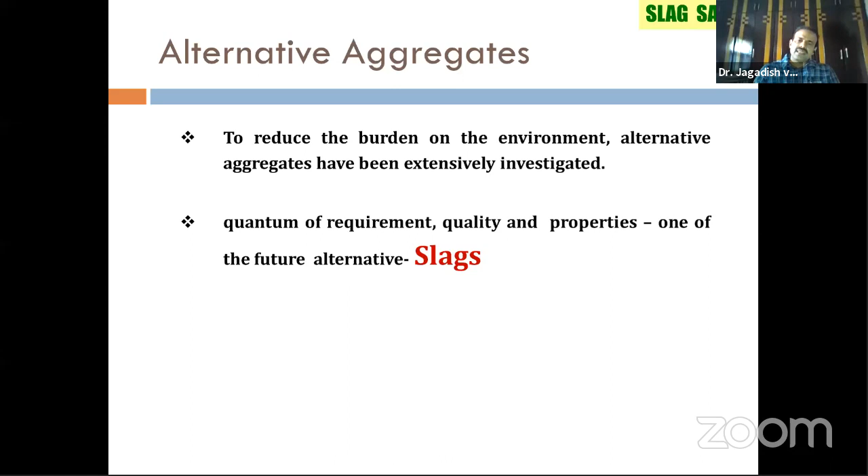When you look into other countries and even our country, these aggregates have proven as suitable material for replacing natural both coarse and fine aggregates. I'll explain how slags are used as a coarse aggregate in concrete.

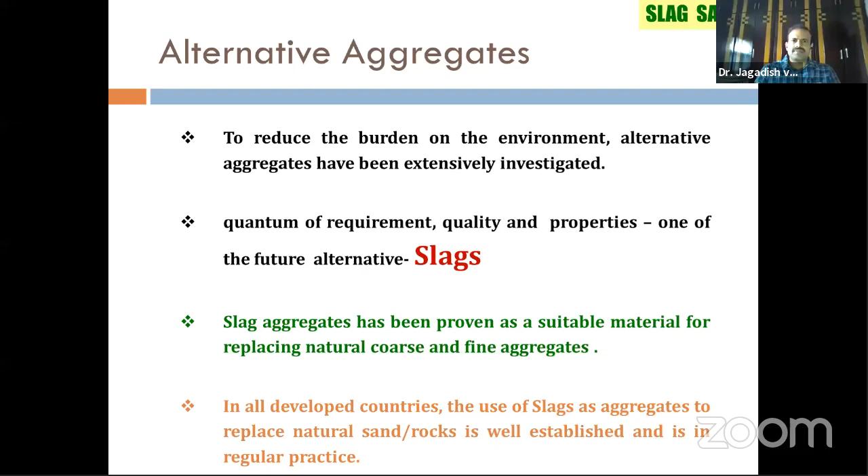When you look into the basic definition of slag, you can see this is blast furnace slag. It is a non-metallic product, consists of glass, mostly contains silicates and aluminosilicates of lime, which is produced in the steel industry while steel making. It is basically a byproduct of the metal smelting process under quality control conditions, because you maintain some temperature and then do quenching, wherein you get the slag along with the main product like iron or steel. So this is basically a byproduct.

It is obtained by rapidly chilling or quenching the molten slag, either by water or by air. So you have both types: air-cooled slag, or by quenching with water you get a different slag. Compared with natural river sand, this sand doesn't contain any organic matter, clay, silt, or shells, because you don't mine near the riverbed. It's a byproduct from steel manufacture.

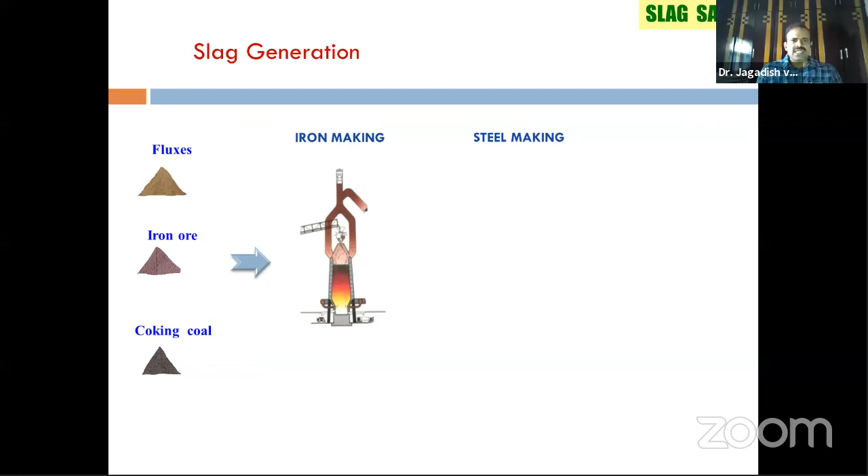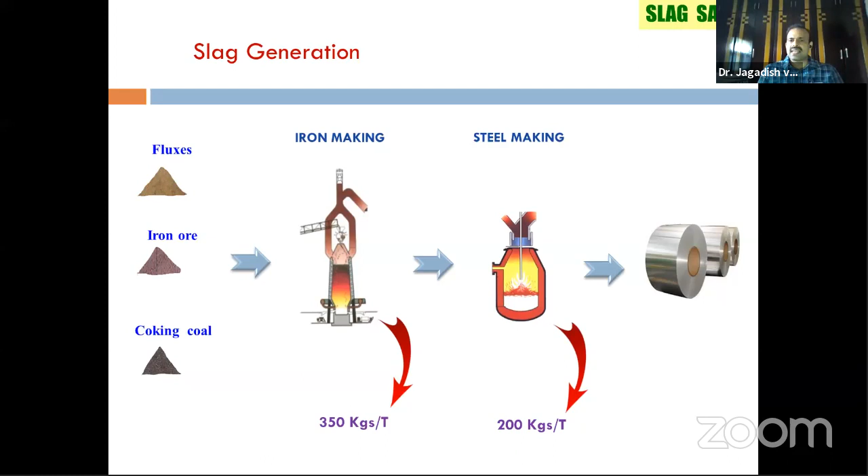When you look into slag generation, both in iron making and steel making, you need to understand the difference. You take the iron ore and coking coal and mix along with some fluxes. In iron making, typically per ton of iron production you get 350 kgs as a byproduct, which is slag. Similarly in steel making, you get almost 200 kgs per ton of steel production as a byproduct slag. But most of the slag generated as a byproduct was dumped in the backyards of these steel plants earlier.

These are some of the slag dumping units at various places and various steel industries.

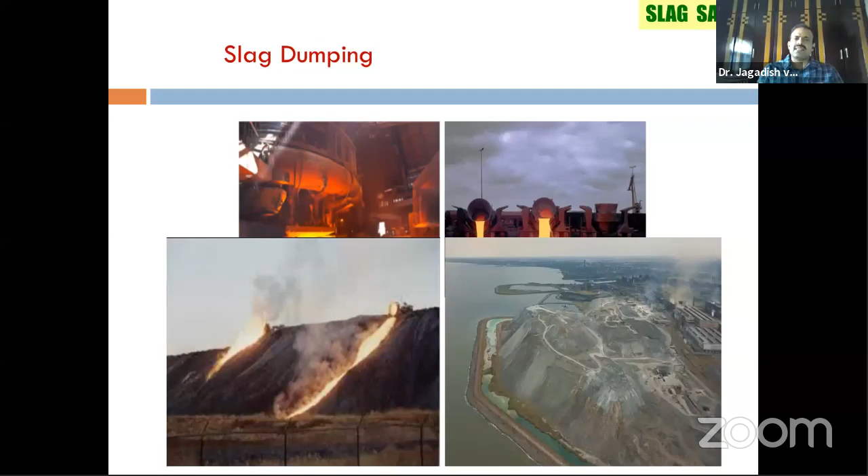Whatever byproduct slag you get from iron making, we call that granulated blast furnace slag, because here you quench it with water and the slag you get is granulated blast furnace slag. Typically this kind of slag you can use for coarse aggregate, fine aggregate, and even for making GGBS. That means this granulated blast furnace slag, you grind it to the required fineness and make ground granulated blast furnace slag, GGBFS.

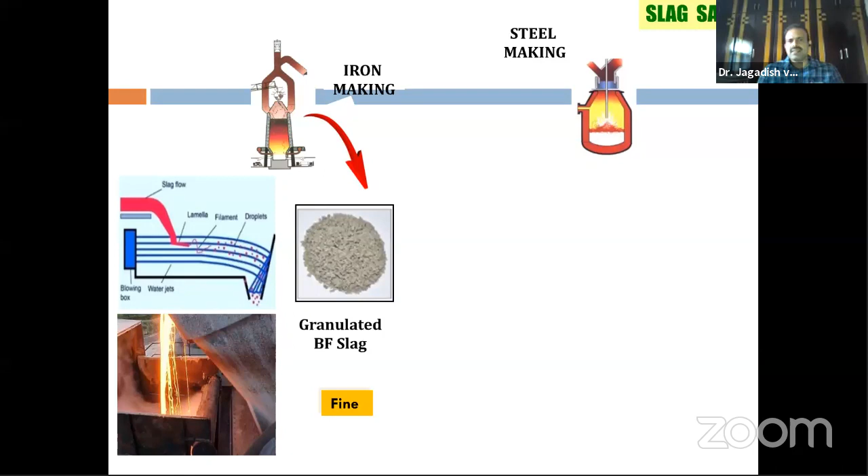When it comes to steel making, generally quenching is done by sprinkling a little water and doing air cooling. So what you get is air-cooled LD slag. This kind of slag we generally use as a replacement to the coarse aggregate.

There are some issues with whatever byproduct slag you get as an aggregate. One thing is it should match the natural aggregate specifications. We all know that to use aggregate in concrete, it has to satisfy the requirements of IS 383, and whatever slag is directly obtained from either steel or iron making has properties different from natural aggregates. Initially there were no standards or specifications to use these alternative aggregates in concrete. Later, in 2016, they included that you can use alternative, that means manufactured, aggregates in concrete.

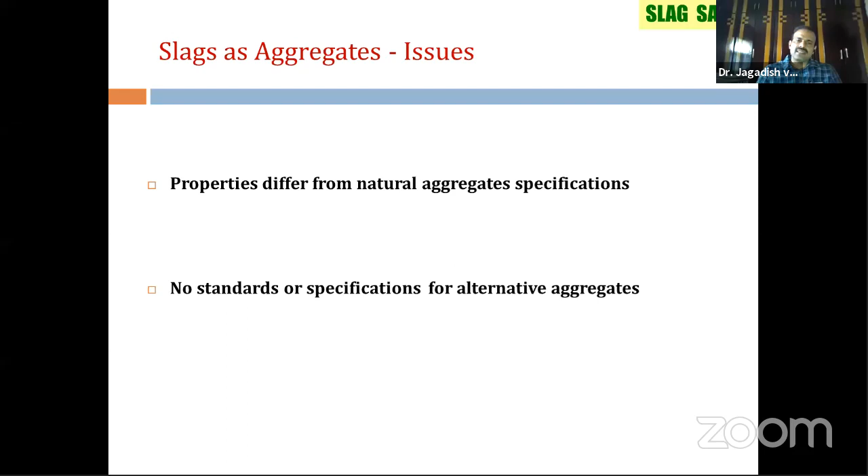So now I talk about granulated blast furnace slag as fine aggregate, that means in place of river sand. When you test river sand as per IS 383, it has to meet some specifications, like size requirements - gradation, zone 1 to zone 4, where zone 1 is coarser and zone 4 is finer. There should also be limited deleterious material, and it should satisfy soundness properties and bulk density.

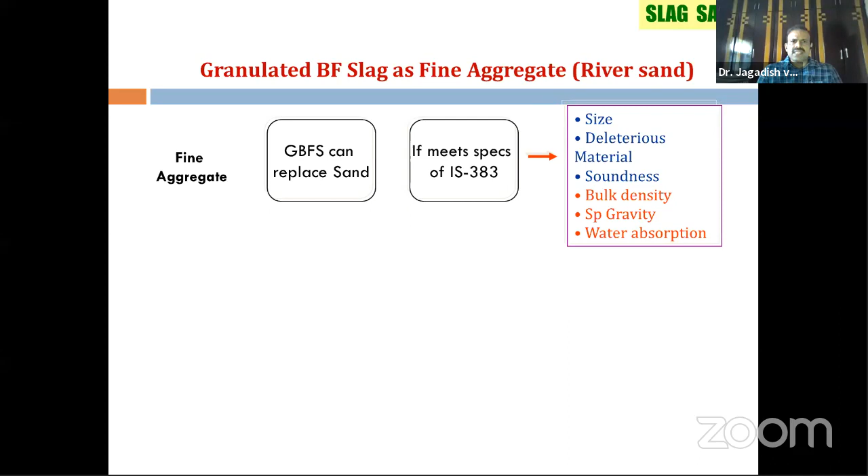Typically the bulk density of sand is between 1500 to 1650 kg per cubic meter. Specific gravity, as we all know, is 2.58 to 2.65 for natural river aggregate. Water absorption properties should also be less, maybe less than 0.5 or less than 1 for natural river sand. So granulated blast furnace slag, if it has to replace sand, it should meet the specifications of IS 383.

When you look into the natural river sand as per IS 383, generally we use zone 2 or zone 1 sand in concrete, sometimes zone 3 also.

Deleterious material is approximately 0.2%. Density, as I mentioned, varies between 1400 to 1700. Specific gravity also between 2.6 to 2.8, depending on the river. And water absorption varies when we check.

For granulated blast furnace slag, if you want to use it as river sand, it has to meet all these requirements. But when they check, density is between 1000 to 1100 kg per cubic meter. Water density is 1000 kg per cubic meter. So if you have to use it, it should match with the river sand properties.

Specific gravity is also less when compared with natural river sand, it is 2.3. Water absorption is also more, that is 4 to 6%. So if density is less, specific gravity is less, and water absorption is more, that means some kind of pores are present in this granulated blast furnace slag material, a vesicular structure containing small pores.

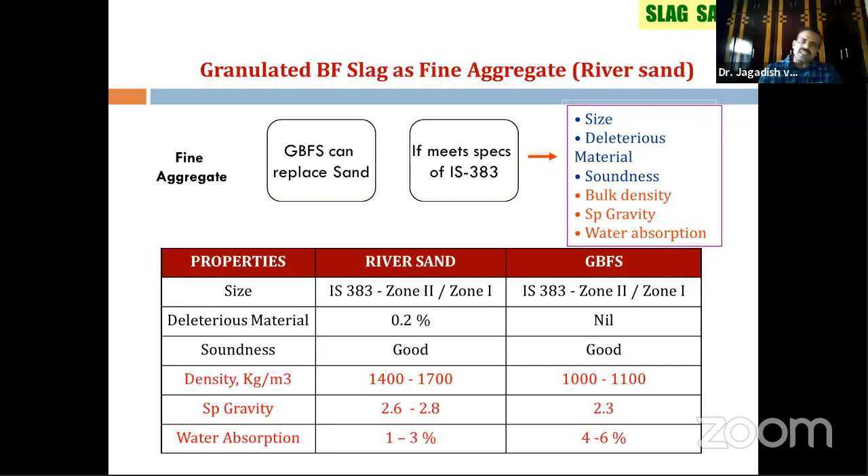So they did microscopic studies comparing river sand and granulated blast furnace slag, because if you have to use it as river sand, it should meet the properties of IS-383.

When they looked into it, it has got a lower density like 1000 to 1100. It contains a vesicular structure with the presence of micropores, meaning more pores, so water absorption will be more compared with river sand, and obviously low density and less specific gravity.

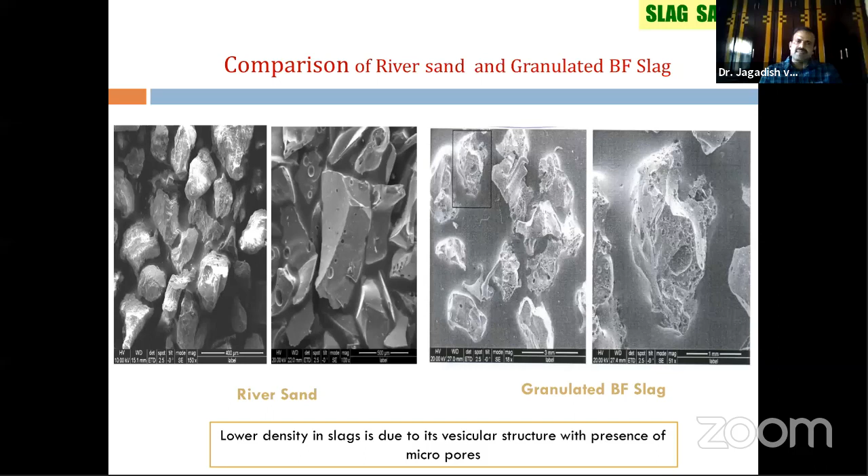So when you use it, you have to match with the requirements of IS-383 and it should match natural river sand properties. So what they did was change a little bit of the processing of this blast furnace slag by changing shaping and screening in the process itself.

They altered the granulation parameters and did some shaping and screening in the machine while making it. By doing so, the particle shapes of this blast furnace slag improved. You all know that flaky or elongated coarse aggregate particles create more voids compared with cubical shape aggregates, so you have to reduce sharp edges and needle shaped particles.

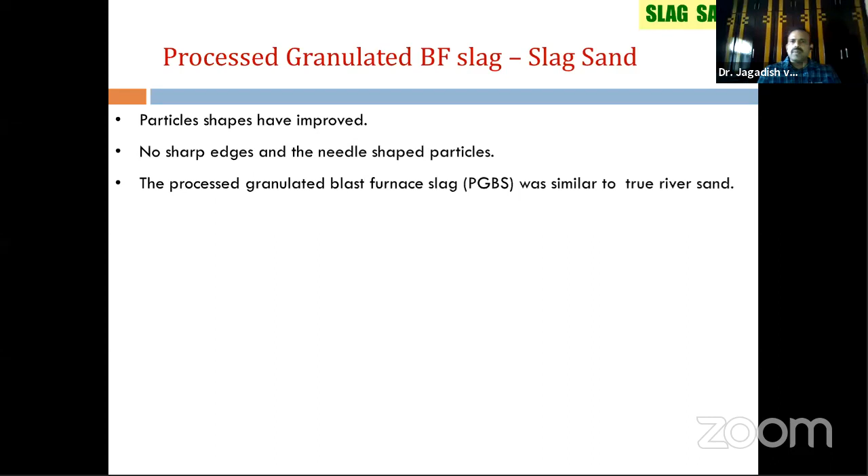By changing the parameters, they achieved better property particles, and the processed granulated blast furnace slag, which earlier gave low density, more water absorption, and less specific gravity, now improved after processing, and these properties are similar to river sand.

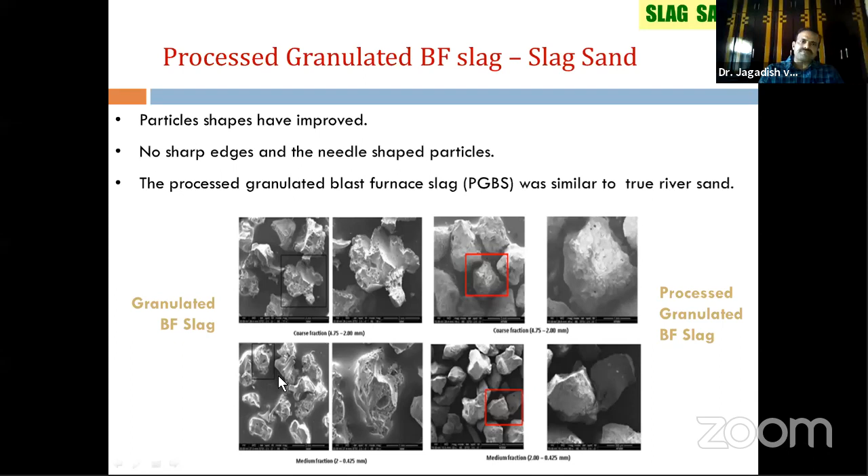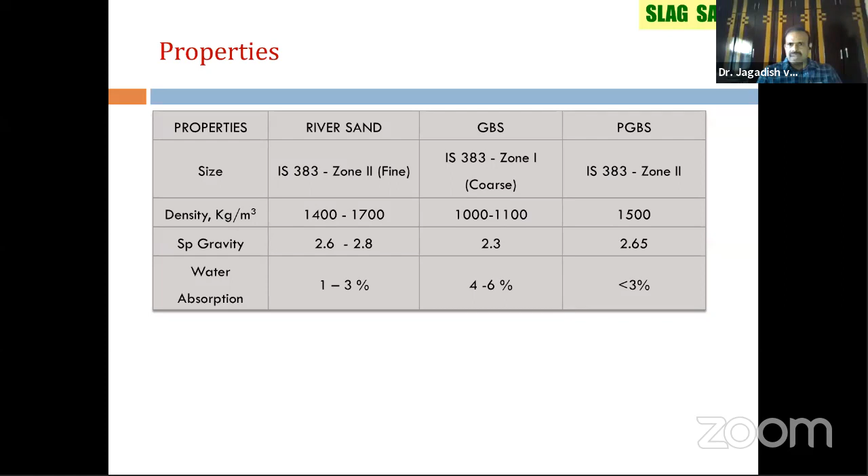So when you look into the properties after processing, density is almost 1500 kg per cubic meter. Specific gravity is almost 2.65, and water absorption is less than 3% as the pores reduced and the vesicular structure is minimized. So the processed granulated blast furnace slag properties are equivalent to river sand.

Some advantages other than density, specific gravity, and water absorption are important. Most river sand is collected from riverbeds, which contains marine products, oversized materials, clay and silt. What is the problem with clay and silt? We all know clay is an organic material. Once it goes inside, over a period of time it comes out and leaves pores inside the concrete, which is harmful to the concrete.

So when comparing processed slag sand to river sand, some of these marine products and clay silt issues are avoided compared with river sand.

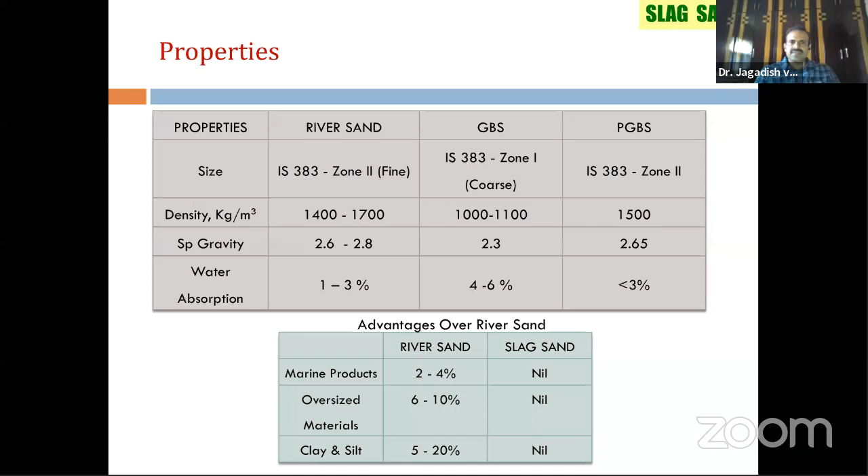Even microscopic examination shows the shape is similar to river sand after processing, and it is almost similar to manufactured slag or manufactured sand. So you can use this processed slag sand either 100% or in combination with river sand or crushed rock fines, whatever combinations you can use.

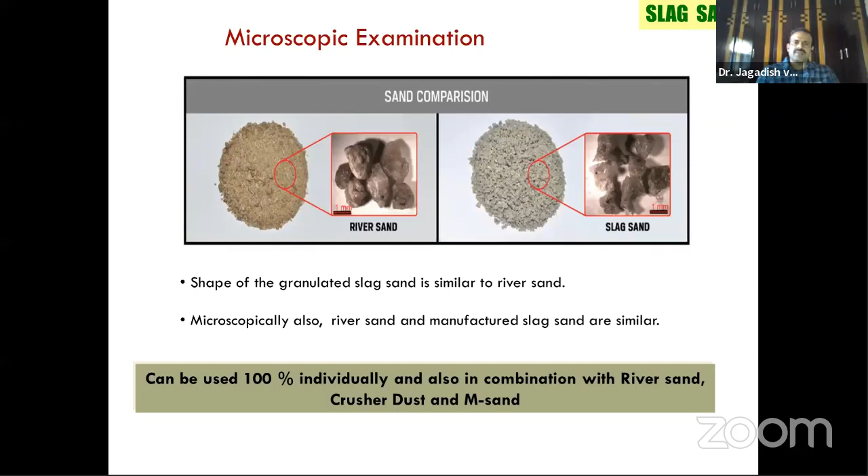Chemical tests were also conducted for this processed slag as per IS 383, as I mentioned. They conducted soundness tests, chlorides, sulfates, and pH. When they checked, it is much lower than the maximum requirements. Take the case of magnesium sulfate, maximum 15% is allowed, but this is only 2%. And even alkali aggregate reactions.

Once you match the river sand requirements, this processed slag, you need to see how the properties of both mortar and concrete behave when you use it as a fine aggregate. So some tests were conducted, as you can see here.

One thing is you can check the flowability, comparing flowability with river sand versus PGBS. The top pictures show river sand and the bottom pictures show processed granulated blast furnace slag. Even the durability tests were conducted and these are giving good results.

You can see the comparison of strength when you use fine aggregate of 100% natural river sand versus various percentages of granulated and processed granulated slag, combinations of 50-50, and with natural sand, M sand, and crushed rock fines. The strength is almost similar. When you compare natural river sand to the processed one, it's almost similar, maybe a little bit different by 1 MPa, which we don't really consider, but it's almost matching. Even when combined with other materials like natural river sand, manufactured sand, or crushed sand, it gives almost the same strength.

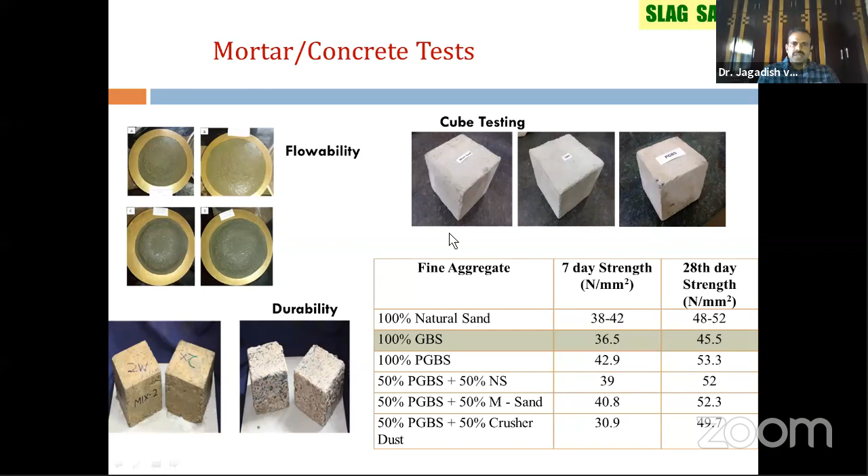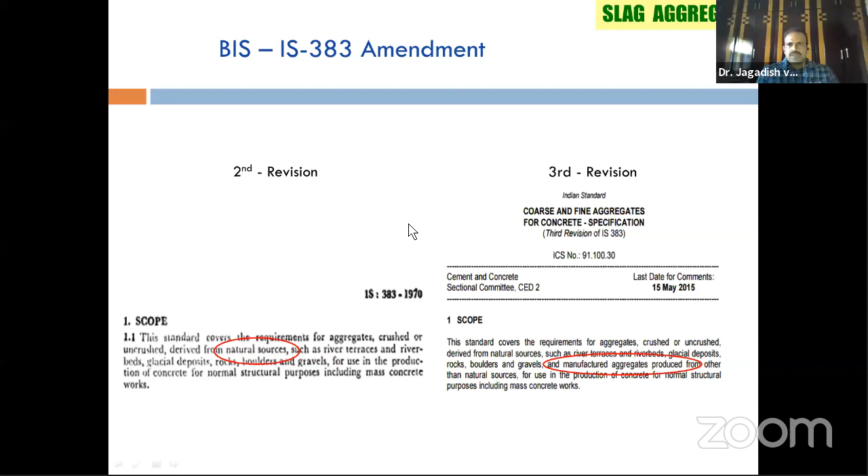This is about the initial trials. Based on these trials, they made an amendment in 2015, as I mentioned. Earlier they mentioned only river sand, meaning sand derived from natural sources like river beds, deposits, rocks, and so on. But for the first time, they included manufactured aggregates produced from other than natural sources, meaning you can now use granulated blast furnace slag as a fine aggregate replacement. This amendment was made in IS 383.

IS 383:2016, which is the third revision, talks about different aggregates. We have already seen iron slag aggregate, that is processed blast furnace slag aggregate. The IS code mentions iron slag obtained from producing iron in a blast furnace, from iron or steel plants, as molten slag at a temperature around 1500 degrees centigrade, suddenly taken out from the furnace and cooled to form different types of slag products.

One is air-cooled iron slag aggregates, the other is granulated iron slag aggregates. In the first case, it involves quenching with water and then cooling and crystallizing. In the second case, granulated iron slag aggregates involve quenching rapidly with large volumes of water. So this is the difference between air-cooled iron slag aggregates and granulated iron slag aggregates.

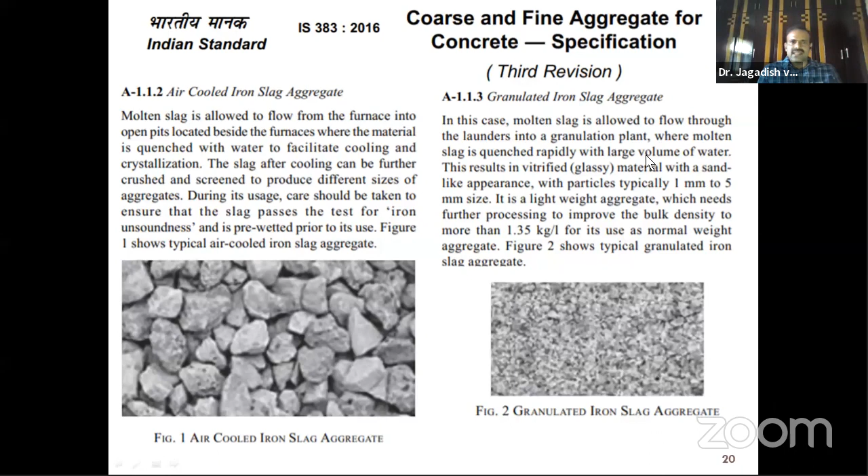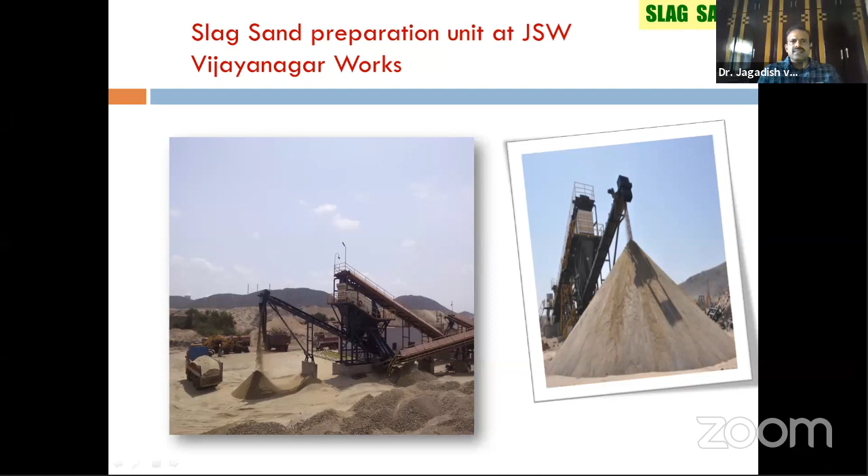This is a typical plant where processed slag sand is prepared at JSW Cements, Ballari, in Vijayanagar—an entire area is the factory. It has a lot of advantages; you can use it in airport runways, highways, flyovers, buildings, and it's suitable for various purposes like concrete, plaster, mortars, and so on. Anyway, I will explain one by one, and I'll take questions at the end.

Once they got approval to use it, they started using it within the plant itself. Slag sand is used in foundations, flooring, and roads within their complex, and even paver blocks were made using slag sand. Even the plastering was made using slag sand. So within the steel plant, they've started using it extensively.

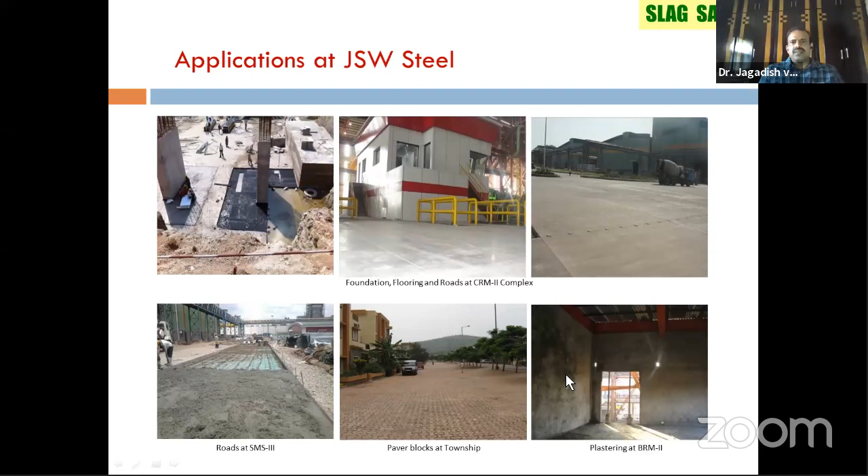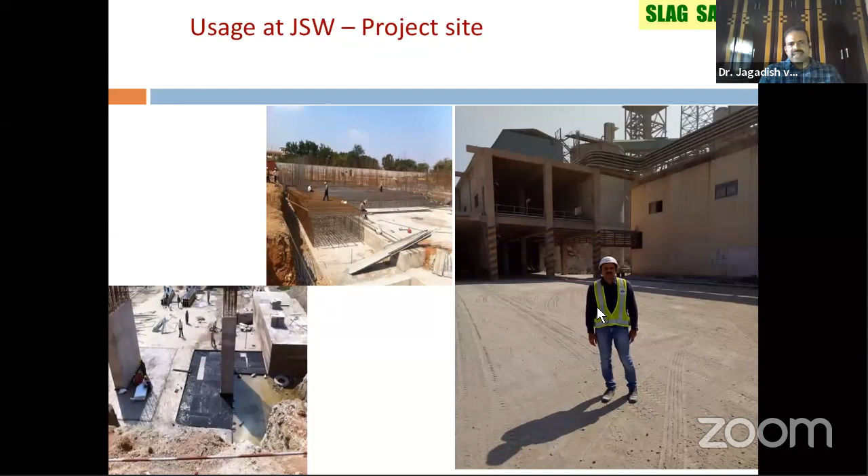I was standing here during my visit to the JSW plant, where I had an association with these people for almost one month. We did some experiments at various sites and so on. They've even used it for flooring for heavy loads, where Professor Nagasrinivasa and the principals mentioned in their initial comments that it is very good in abrasion resistance also.

After using this slag sand internally, they started supplying it to nearby places. The nearby city is Ballari. They started supplying to Nirmithi Kendra buildings, meaning state government projects, and started using it for plastering applications. You can see here, plastering work going on, where the slag sand is used as a fine aggregate.

So this is about the slag sand used as fine aggregate. Coming to the coarse aggregate, as I mentioned, there are two types of slags—it comes as a byproduct: one from iron making and the second from steel making.

In iron making, you get a byproduct of 350 kgs per ton. In steel making, you get 200 kgs per ton. Steel slag aggregates are cooled down from 1400 to 1700 degrees centigrade and suddenly quenched in air.

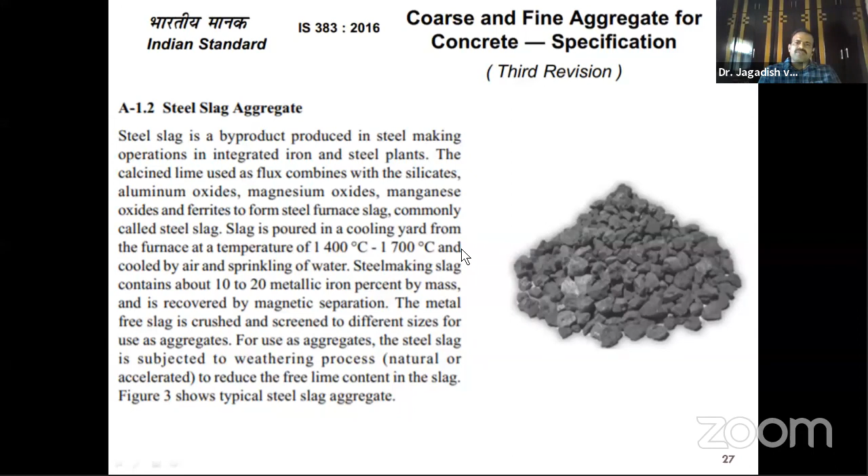That means this is air-cooled steel slag, as we call it, with a little bit of sprinkling of water done during the process. So this is a byproduct, steel slag aggregate. Because it's quenched out in air, the density is much, much higher compared to the other slag—almost like 3.2 to 3.5 specific gravity.

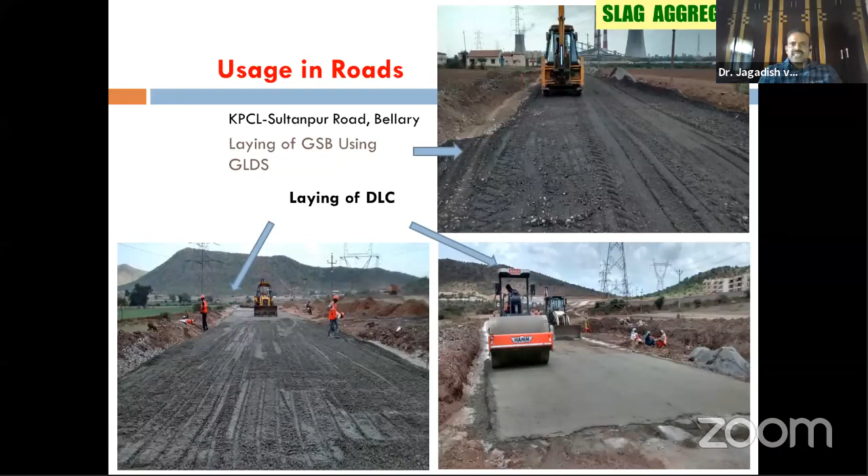This steel slag coarse aggregate can be used as a coarse aggregate. They started using it for internal roads within the campus. So if you take road works, you can use it for all purposes - as a granular sub-base, in dry lean concrete, and even in pavement quality concrete, PQC. You can use it in all 3 layers.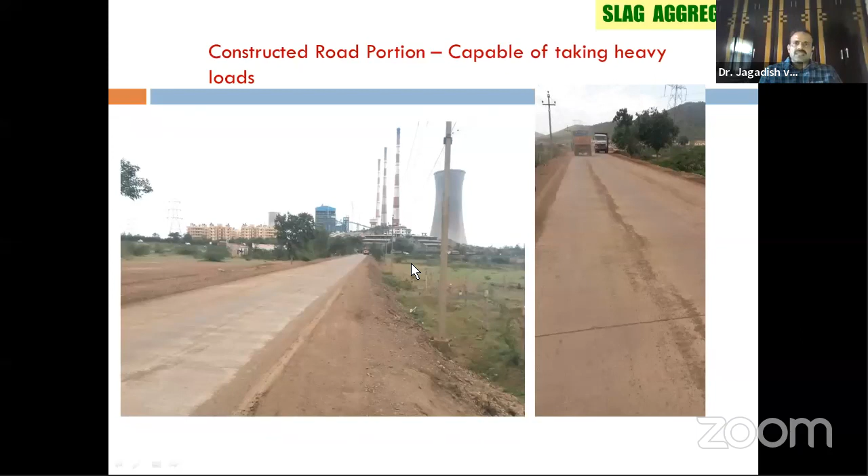This is one of the road portions constructed using the coarse aggregate, steel coarse aggregate. You can see a lot of heavy trucks are moving around on it.

A very interesting thing - while coming back from the JSW plant, I observed this Hospet Bellary Road, National Highway 63. Gammon people did the work and they've utilized this steel slag as coarse aggregate. You can see on this side, the coarse aggregate is lying next to the road. So this is the first time in India a complete slag-based road has been made - the Hospet Bellary Road, NH63.

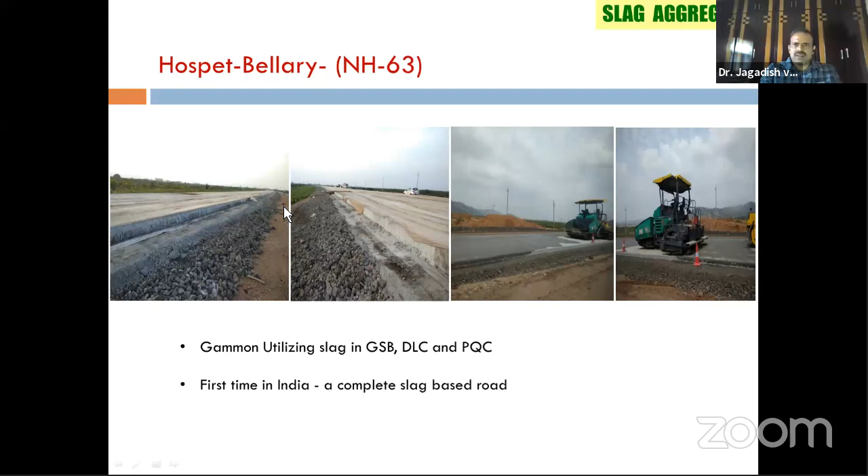So you've seen both fine aggregate and coarse aggregate, using slag as both fine and coarse aggregate.

Now I will come to GGBS, that is ground granulated blast furnace slag. You grind it to the required fineness and use it - finer than cement. If you take cement fineness, the Blaine's air permeability test shows the cement fineness is like 300 square meter per kg. This GGBS is much, much higher when compared with cement fineness - specific surface area, we call it.

So GGBS, as I mentioned, is molten slag produced during iron production, not steel. It is very rapidly cooled and slags are formed, then ground to amorphous form. This reactive matter, in presence of lime, forms further CSH gels because it contains silicates and aluminates of lime, and secondary hydration happens. You have to grind it to adequate fineness, and then you can use it as a cementitious material. The processed form of granulated slag we call ground granulated blast furnace slag, commonly GGBS.

So what does IS 456 say? When you look into IS 456:2000, in the table the maximum water cement ratio is 0.55 for reinforced cement concrete, and cement content starts at 300, with maximum cement you can use being 450 kg per cubic meter of concrete. IS permits this based on different exposure conditions - mild, moderate, severe, very severe, and extreme conditions. Depending on the exposure condition, you go for a minimum grade of concrete and minimum cement content, and restrict the water cement ratio also.

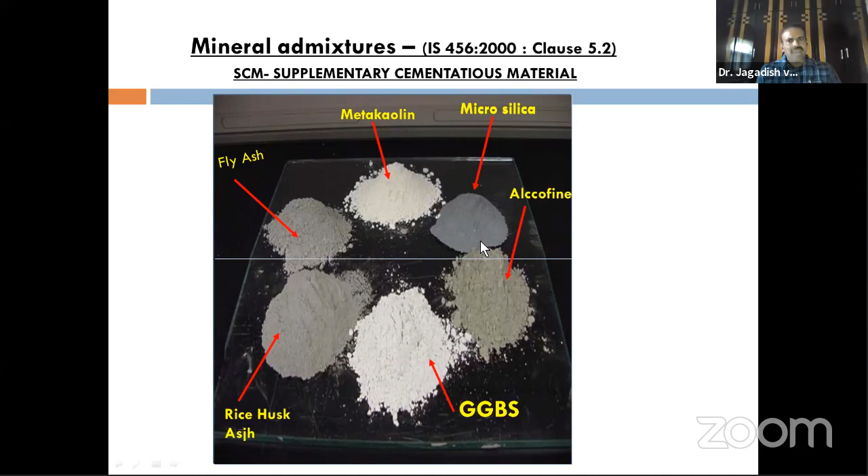IS permits you to use supplementary cementitious materials - GGBS, microsilica, fly ash, metakaolin, alcofines, rice husk ash. You can see fly ash, GGBS, and microsilica are the most commonly used materials.

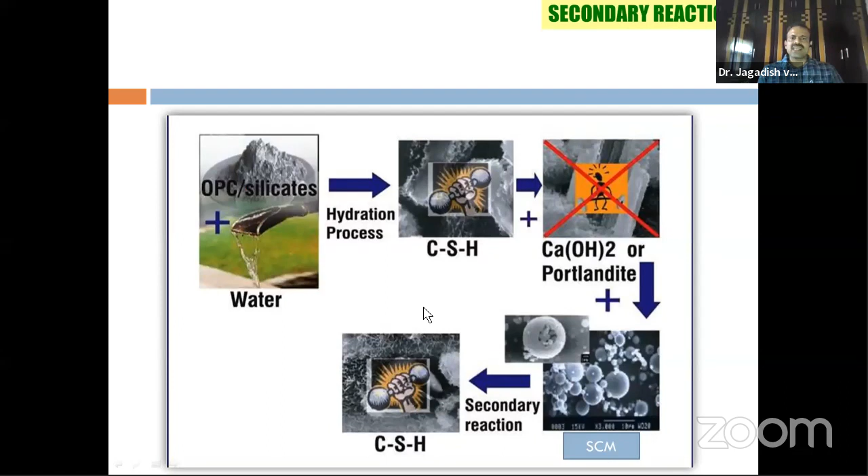So what do these supplementary cementitious materials do? When water is added to the cement during concrete manufacturing, the hydration process starts. We all know calcium silicate hydrate gives the strength - CSH gels form, and excess lime is present, which we call calcium hydroxide or portlandite. When you add supplementary cementitious materials like GGBS or fly ash, this excess calcium hydroxide reacts with them and forms further CSH gels. That means you are filling the pores and making the concrete denser by adding supplementary cementitious material.

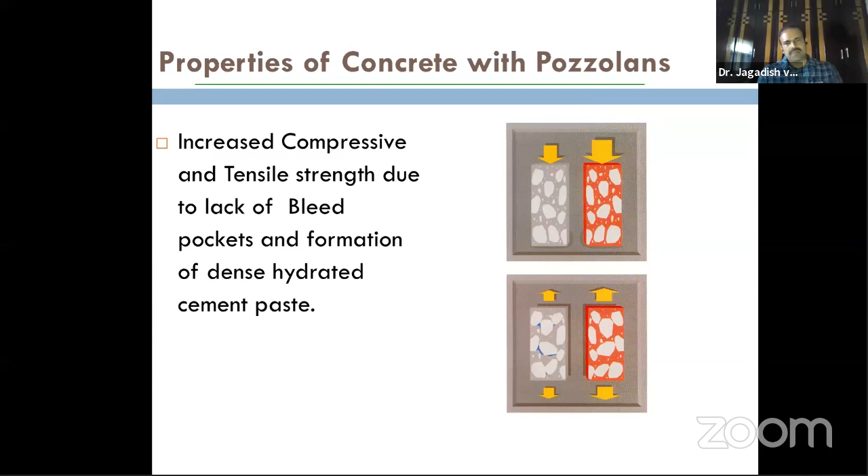But here our interest is GGBS. Anyway, this is the basic reaction - normal concrete has more pores, but here more CSH gels form and the concrete becomes denser. More denser means more strength, and impermeability increases. Because the bleed pockets are covered with excess CSH gels forming dense hydrated cement paste, you definitely observe increased compressive and tensile strengths in the concrete by adding supplementary cementitious materials.

When it comes to GGBS, the replacement levels of OPC - before explaining this, let me give an overview. You all know ordinary Portland cement, then Portland pozzolana cement, wherein fly ash is replaced up to 35% in the cement. And in Portland slag cement, they go up to 65% replacement - I'm talking about cement manufacturing, OPC, PPC, and PSC. But when you're directly adding supplementary cementitious material to the concrete, the replacement levels based on different works all over the world are like this.

Particularly for on the ground concrete structures, when aiming for higher early age strength, one can replace up to 25 to 35%. Underground structures face an aggressive environment because the soil is corrosive, so due to soil corrosion, one can go up to 35 to 50%.

For mass concrete, to reduce temperature and strictly control it, one can go up to 50 to 65%. For specialty concrete structures where durability is required, particularly corrosion-resistant marine structures and sewage treatment plants, one can go up to 50 to 70%, depending upon the different applications.

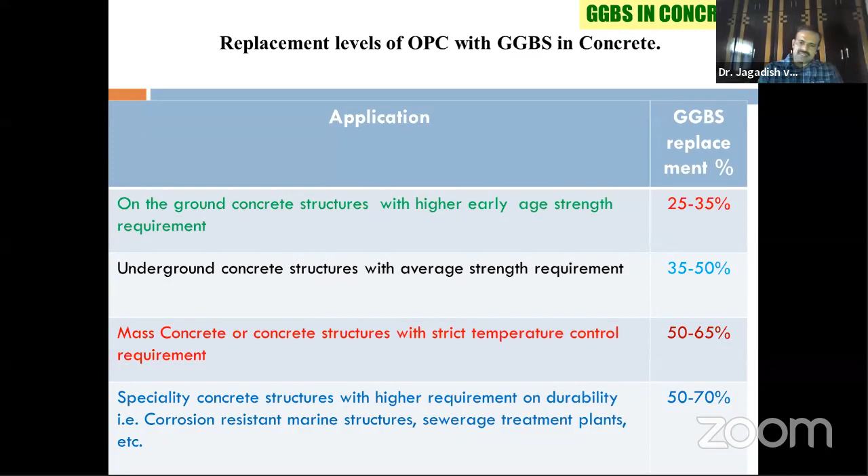But what IS says is we all follow IS 10262 to design the concrete mix. Till now, IS 456 or IS 10262 never talked about the percentage of supplementary cementitious materials. But when you look into the new IS 10262 2019, which is used to proportion the concrete mix, some guidelines are given.

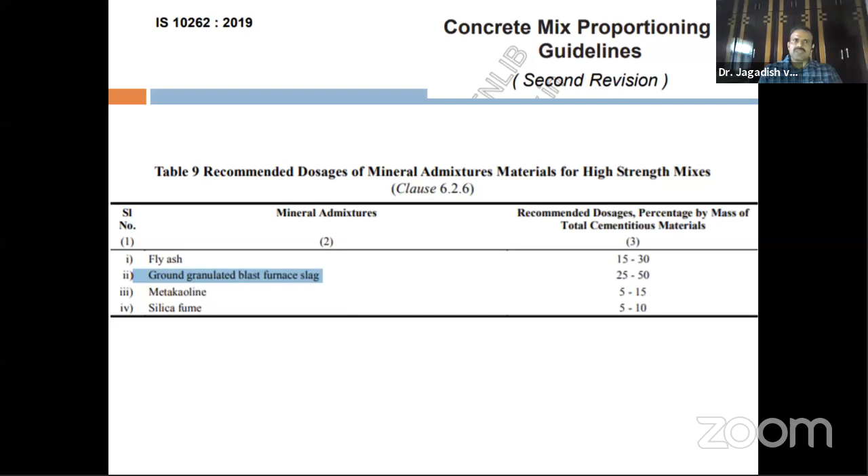For high strength mixes, among all the supplementary cementitious materials, GGBS can be replaced up to 25 to 50%, compared with fly ash which is 15 to 30%. So I'm just mentioning here, GGBS can be used up to 25 to 50%. You have the code support, IS 10262, and well proven test results.

This is one case study I've taken from our JSW friends. This is the Bangalore Metro Rail project, phase 2. These are some of the mixes used for pile, pier and segment, using both M35 and M50 grade concrete. For M35, they used 400 kg cementitious material, with 200 cement and 200 GGBS. For pier and segment columns, they used M50 with cementitious material up to 500 kg.

Somebody may ask, sir, you just told us 450 kg per cubic meter is the limit, but that 450 kg per cubic meter is for cement only. You can use supplementary cementitious material up to 600, particularly for self-compacting concrete, where cementitious material can go from 450 to 600 kg per cubic meter. In this case, they used 500 kg, with cement alone at 400 and the rest, 100 kg, as GGBS.

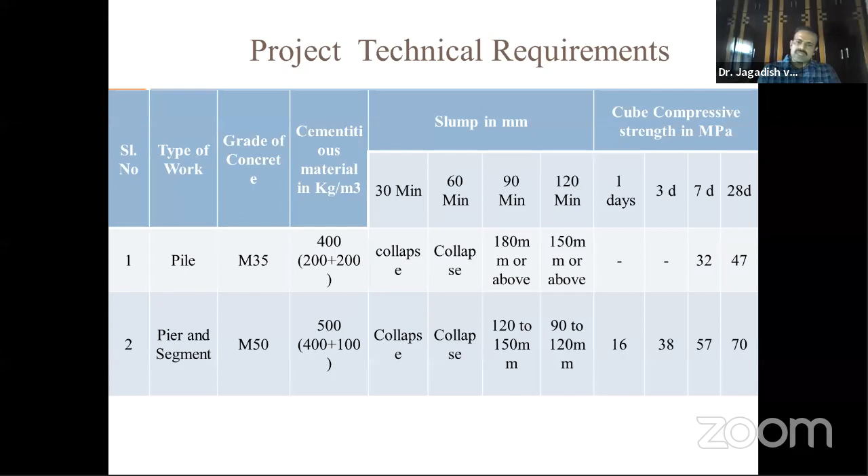You can see the slump at different delayed timings, and you can also see the consistent 28-day strength achieved: M35 got 47 MPa, M50 got 70 MPa. So these are some of the trials, the initial trials conducted before giving the mix to the client.

One of my friends, Mr. Yogananda, with whom we conducted a combined project, is from JSW and was present in this slide.

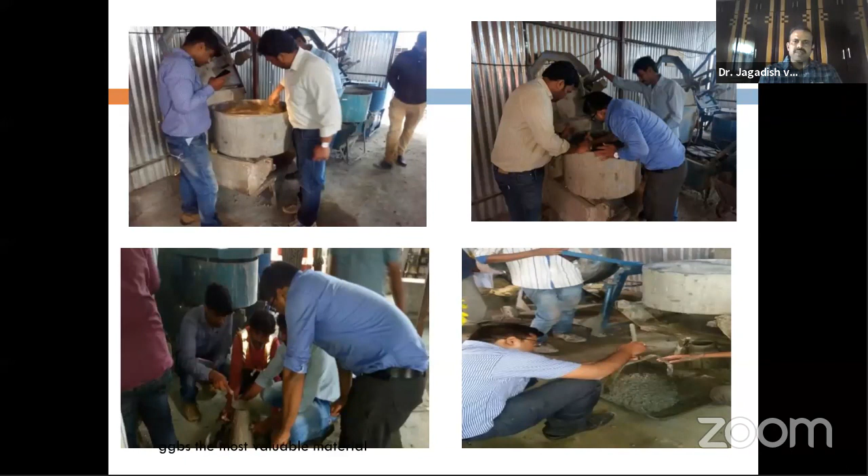When you are using GGBS or using admixture along with chemical admixture, you have to look into the compatibility between the cementitious material and the superplasticizer. To get a denser concrete, you have to reduce the water cement ratio, while at the same time achieving workability, which requires using a chemical admixture for workability and strength together.

To get the optimum dosage of superplasticizer chemical admixture, we use a test called the Marsh cone test. This is a hollow inverted cone with an aperture of 8 mm, where you pour the mortar into it, open the bottom gate, and measure the time required for it to flow through the small aperture, basically measuring the viscosity of the material.

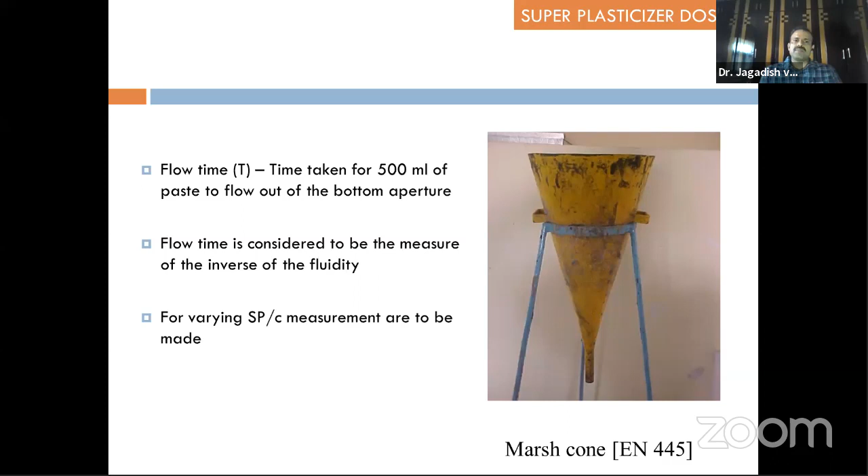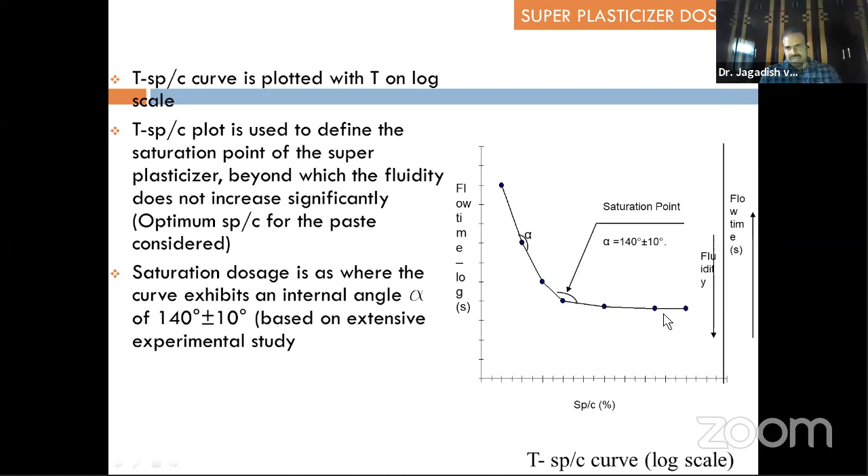Typically, you take 500 ml of paste, fill it in the cone, and measure flow time with different superplasticizer-to-cement percentages, plotting flow time versus superplasticizer dosage. You get a curve like this: after a certain point, even though you add more superplasticizer, there's no change in flow time. Typically, this saturation point is around 140 plus or minus 10 degrees.

These are some experiments conducted at our earlier college, BMS IT, with our students. You can see the Marsh cone where we placed the mortar and measured the flow time for a typical mix. At 0.1% admixture, flow time is 17 seconds; at 0.2%, 15 seconds; at 0.3%, 11 seconds. After 0.3%, at 0.4% and 0.5%, it gives the same seconds, meaning 0.3% is the optimum dosage of the chemical admixture, and beyond that you should not add more.

So that is how the marsh cone test gives you the optimum dosage of superplasticizer when you are using cementitious material, particularly when you want to know the optimum dosage of the chemical admixture for a particular concrete mix.

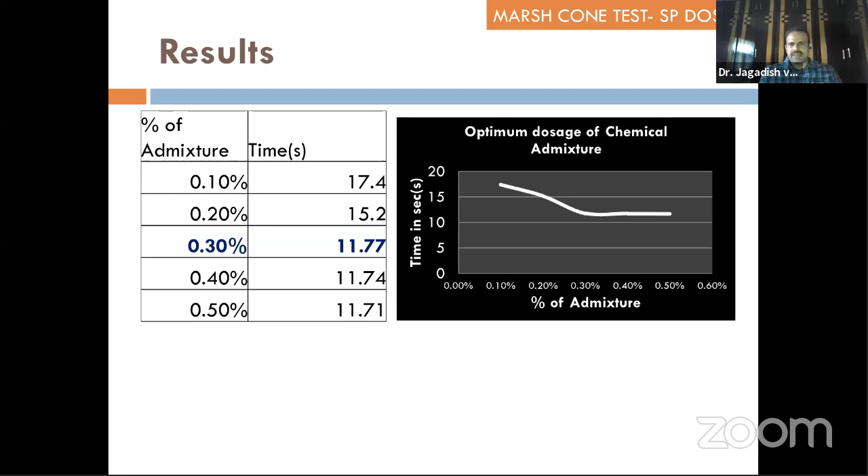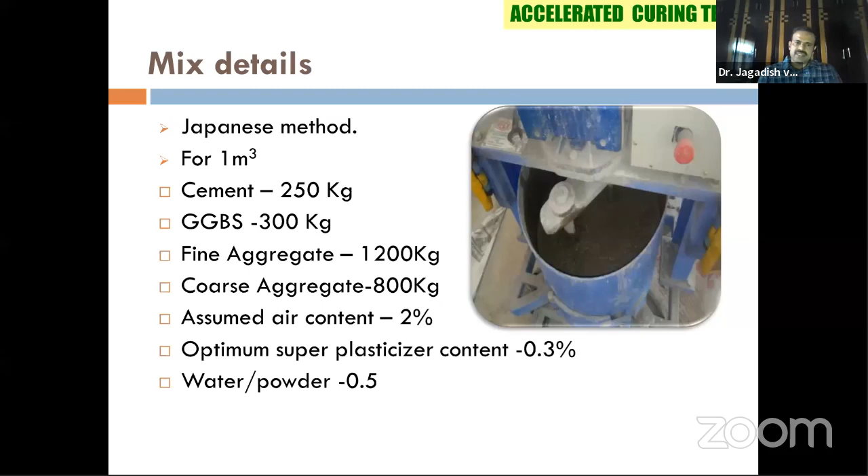Next, very important, is the accelerated curing test. Many times you go for a number of mixes, so you cannot wait for 28 days. You have to check the strength the next day so that if any problem is there, you can refine the mix, go for a second trial, and then check it again. Typically, all of you know how it is done.

You cast the cubes and leave them for 23 hours plus or minus 15 minutes. Then you remove the bottom mold, including the concrete mold, and place it in a curing tank of water at 100 degrees centigrade. You boil it for 3.5 hours plus or minus 5 minutes. Later, you remove the mold, take out the cube, cool it for 1 hour at normal temperature, air dry for half an hour, and then carry out the compression test.

You all know IS 9013 is the code wherein you check the accelerated curing strength and projected 28-day strength. The relation given is 8.09 plus 1.64 into RA, where RA is the accelerated curing strength obtained the next day after 27 or 28 hours.

This is one typical mix with a 100 mm cube using 12 mm down aggregate. We made the cubes, but the results are not shown here. That is how you conduct the accelerated curing test. I think something is missing.

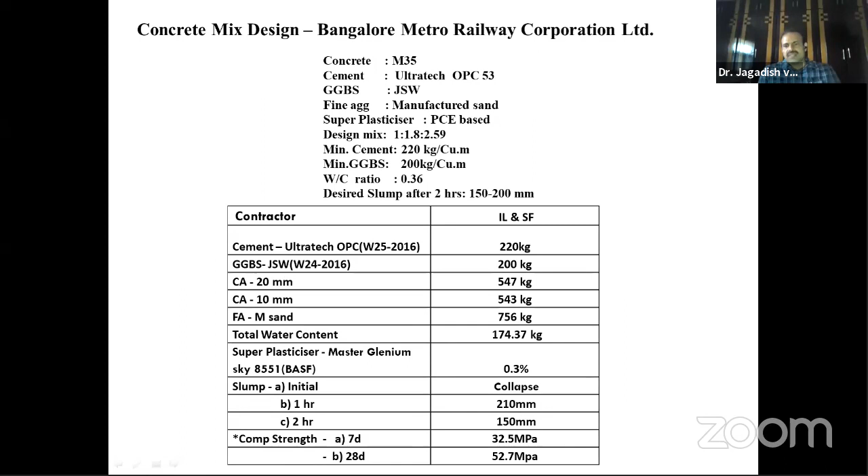This is the mix design used in the Bangalore Metro Railway, as I mentioned earlier, where they used a PCE-based superplasticizer, 220 cement, 200 kg GGBS, and a water-cement ratio of almost 0.36. The slump shown is a collapsed slump, checked after 1 hour and after 2 hours, since it has to be placed as a flowing concrete. It's an M35 grade of concrete, and the 28-day strength achieved was 52 MPa.

Comparing with fly ash, since each supplementary cementitious material has its own advantage, for mixes like M30 and M35, in place of 310 plus 80 with fly ash, one can increase the cementitious material—like instead of 80, going up to 160 GGBS in place of fly ash—where early strength requirement is a concern, and still achieve good compressive strength. Similarly, for M35, in place of 100 kg fly ash, one can go up to 190 kg of GGBS.

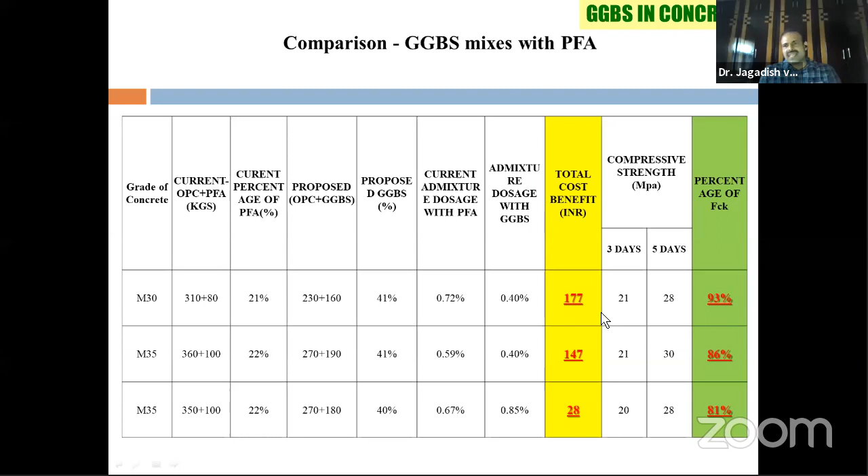So you obviously get the advantage of both strength and cost. If somebody asks what is the cost of GGBS, you know cement is approximately, depending on area to area, 300 to 350 rupees per bag. But GGBS you get for 180 rupees per bag, meaning half the cost compared to cement.

Even in self-compacting concrete, people are using GGBS, because in self-compacting concrete the cementitious material itself has to be used at 450 to 600 kg per cubic meter. You cannot use cement alone, because IS 456 says the maximum cement content alone you can use in a self-compacting concrete mix is 450 kg. Beyond that, heat of hydration, drying shrinkage, and cracks become problems. So the option is to use supplementary cementitious material.

Fly ash can be used, and GGBS was used in one of the structures, Sobha Indhraprastha, a monolithic structure in Bangalore, where they used M50 grade SCC with GGBS. The slump obtained was around 650 plus or minus 30, and compressive strength was 42 MPa at 7 days, 63 MPa at 28 days, and almost 72 MPa at 90 days. Even at 181 days it was 78 MPa with GGBS.

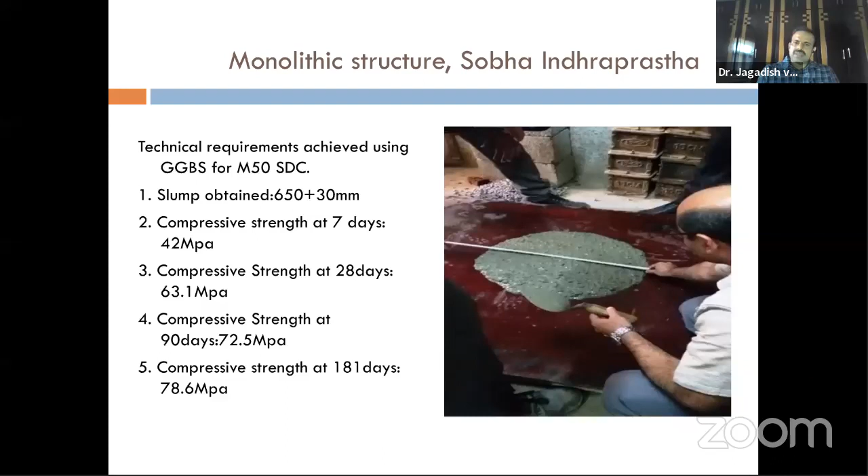This is an example of how GGBS can be used in special concretes. This is again the Sobha Indhraprastha project, showing the actual sheet of long-term strength gain. At 111 days, it is almost 224% strength gain from 28 days. At 28 days they got 33 MPa, and at 111 days it was 56 MPa, using 170 kg cement and 170 kg GGBS for M25 grade concrete. This is for the Sobha Indhraprastha project.

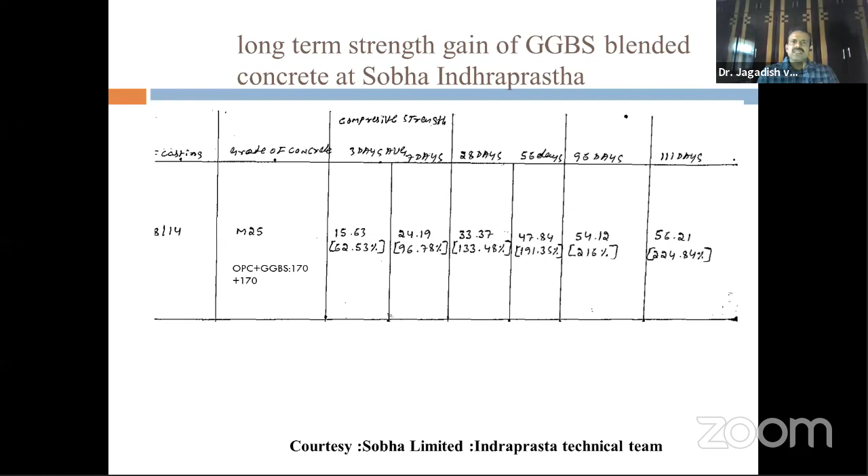Coming to the last part of my presentation, this is the work we have done on solid concrete blocks—very interesting work. When I was head of department at BMS Institute of Technology, one batch of students approached me, and I said let us go ahead with this project. JSW sponsored the materials, and we thought of replacing GGBS in solid concrete blocks. The students, whose friends had 2-3 plants, approached me, and I asked them to visit a number of solid concrete block units in Bangalore.

When they visited 15 to 20 solid concrete block manufacturing units in Bangalore, the students came out with certain points. I wanted to know what is happening in the solid concrete block units right now, what they are practicing. So when they visited, we understood some points which we have listed out.

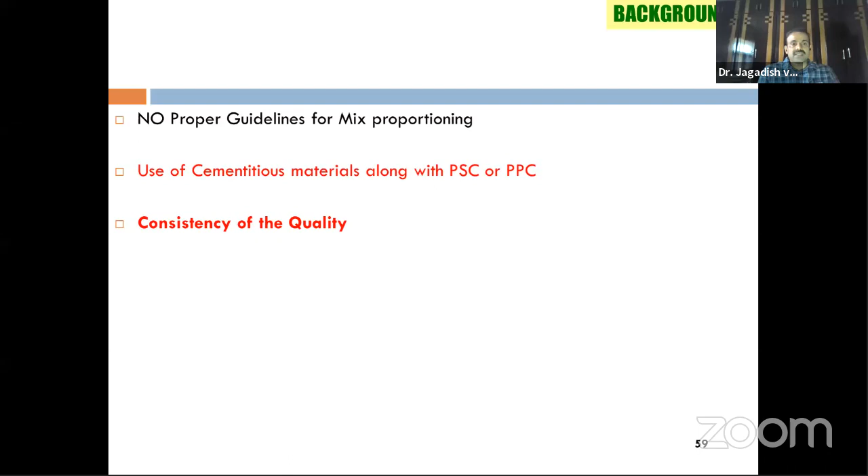There is no proper guidelines for mix proportioning. Very interesting thing we noted, they are using fly ash mixed in, even instead of OPC they are using PSC or PPC. That means PSC, PPC already contains fly ash or GGBS, but they are using that cement and again replacing fly ash, because the mix operators and all don't know. And consistency of quality is a problem plant to plant and batch to batch.

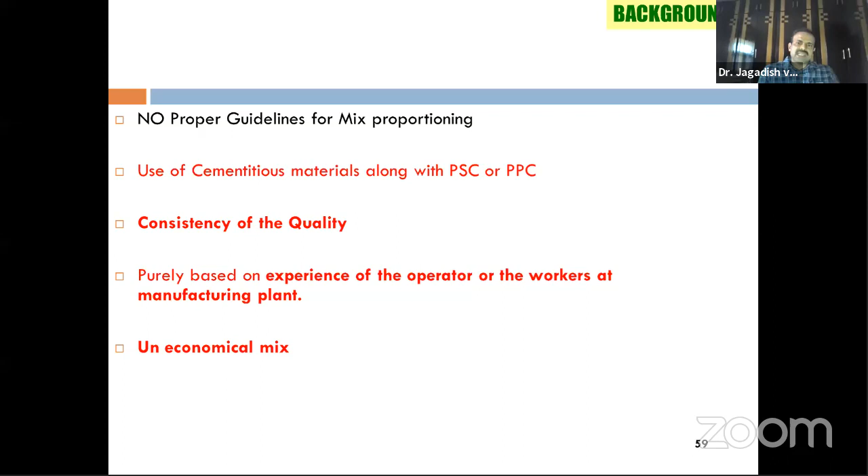These manufacturing plants run purely based on the experience of the operator or workers, meaning the awareness is not there. Also, most of the time they end up in uneconomical mixes, either putting more cement or less cement. That is why sometimes you get a very good block, sometimes the edges are torn off, and then you get all sorts of blocks.

Having this as a background, we wanted to work on this project. So we started working from the code, because IS 2185 talks about solid concrete blocks. We went through the code, part 1.

So there are 2 grades, you can produce 4 MPa blocks or 5 MPa blocks. Very interesting, I'll let you know what this 4 MPa and 5 MPa is.

So then we thought of using different materials, different combinations - only cement, with fly ash, with GGBS, with manufactured sand, with different aggregates, with different chemical admixtures. A lot of combinations we made, and we did a lot of trials.

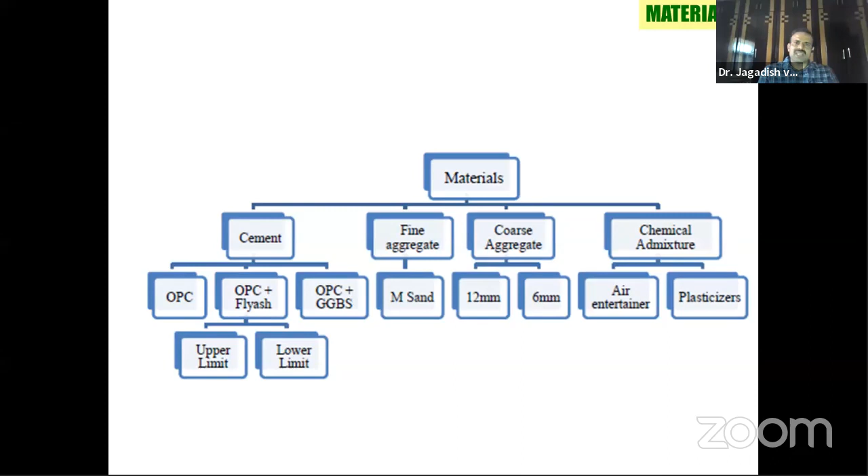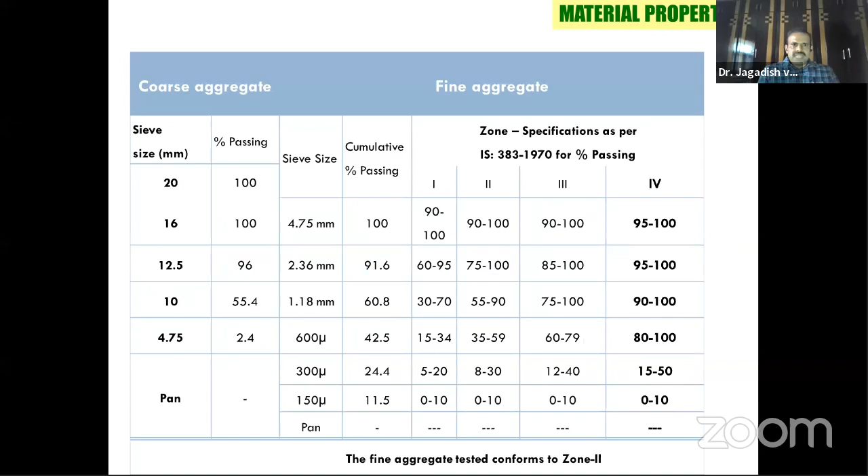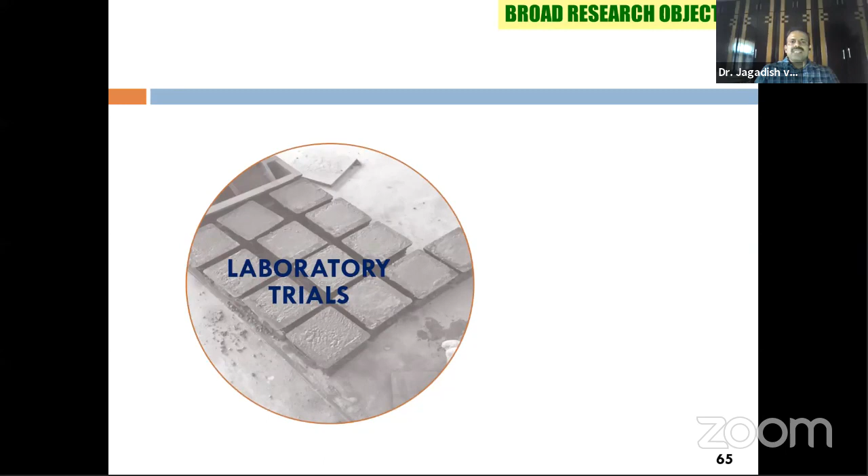So we have taken this project in 2 stages. One is conducting laboratory trials, and then based on the optimum mixes obtained in the laboratory, we thought of going to site and doing full scale site trials. So 2 parts in the project we did.

When they went and visited 20 to 25 manufacturing plants, they understood the cement content varies between 200 to 100 kilos - somebody is using high, somebody is using low. The range is something like 100 to 195. So we have taken the cement content between 200 to 100 kgs - 3 mixes, 200, 150 and 100.

Then we designed the mix for more than 5 MPa. First is getting the optimum mix, which once we get, has to satisfy 3 requirements as per IS: strength, water absorption, and density. Second step, we replaced the cement with GGBS at different replacement levels. Third stage, we did trials using a little bit of superplasticizer doses to get a better finish. Last stage, we did the trials at the site.

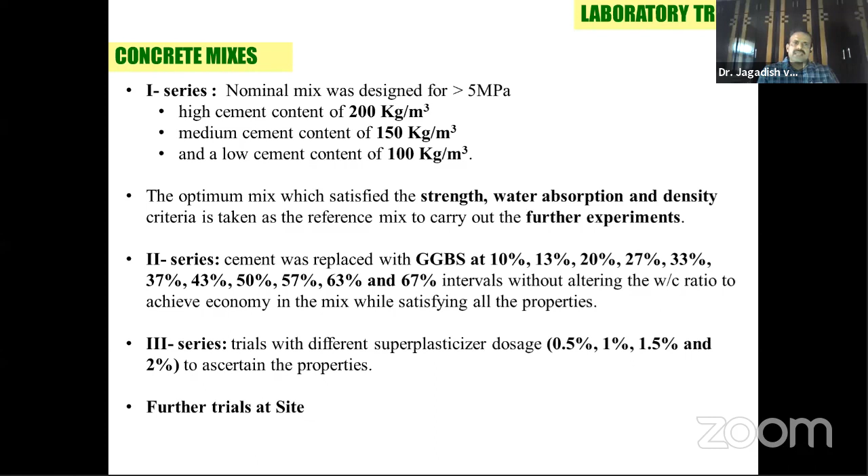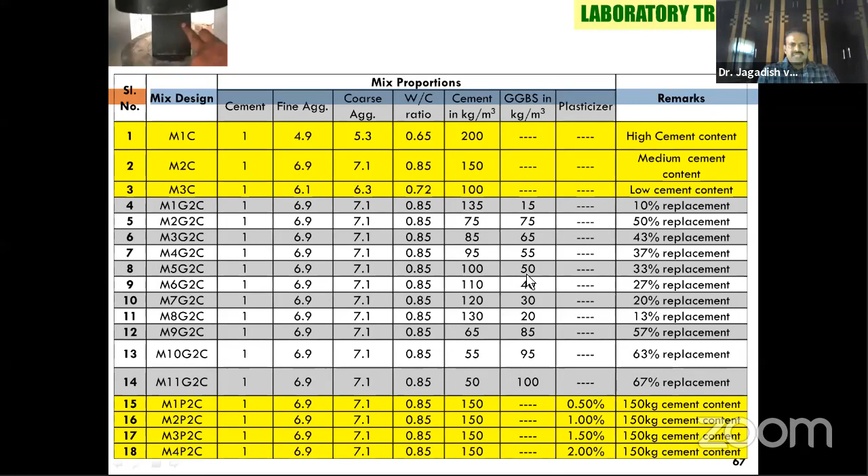These are the mixes. The first yellow color, 3 mixes are with 200, 150, and 100 kg cement content. The mixes 4 to 14 are with cement at 150, which is the optimum mix we got, replacing cement with GGBS at different replacement levels - 10, 43, 37, and so on. The last mixes are with the replacement and dosage of the superplasticizer.

So as I mentioned, these are the laboratory trials we conducted. First thing is laboratory trials, as I mentioned. Suddenly the student is very smart.

He came and asked me, sir, in the plant you have an egg laying machine. They don't vibrate - they place it in that mold, and it gives a little bit of pressure. I'll show you what is an egg laying machine. So then, sir, here vibrating is not feasible, so tell me what we have to do.

Then I said, don't vibrate it. Place the cube on the vibrating machine and just switch on, switch off - that means 3 to 4 seconds of vibration happens just to settle. That's what we related somehow with the site practice to laboratory practice, just to know what it is.

As I mentioned, once you cast different trials, you need to conduct various tests on these cubes. As per IS, compressive strength, water absorption, and density are the three major properties one has to look into.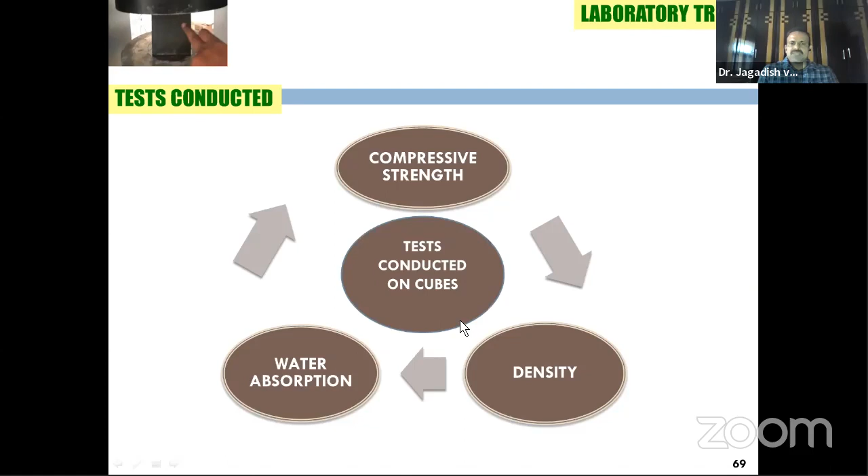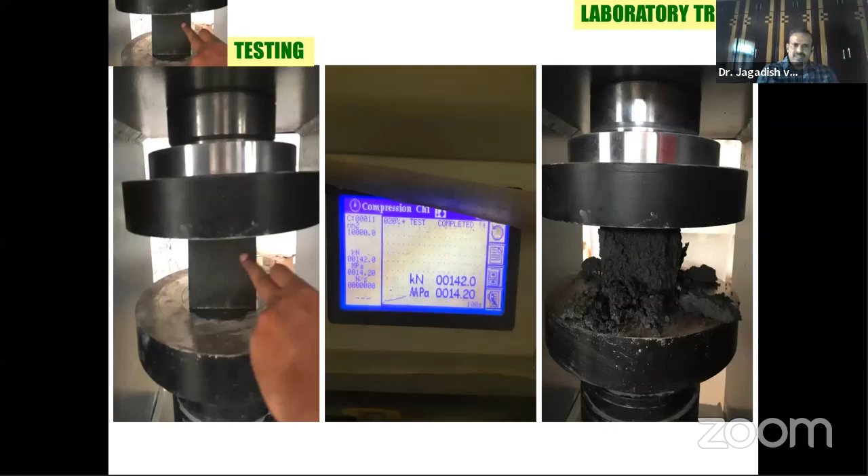So when you look into the IS, the testing is done. You can see one of the cubes gave 14.2 MPa in one trial. Actually what you have to get is 5 MPa, and this is a 28 day cube. These are the results we got for all those mixes I showed initially. So for 28 days strength, all are passing more than 5 MPa. Water absorption is also passing, and density is also passing.

So one has a question, sir, what are the limits? Very interesting. IS gives water absorption limits for 2 grades, one is the 5 MPa grade and the other is the 4 MPa grade. First is density, it should not be less than 1800, that means it should be more than 1800, it should not be too low. Average strength should be more than 5 and 4 respectively, and water absorption shall not be more than 10% by mass when you test it.

Here I wanted to tell you that for compressive strength of cubes, we take the average of 3. But in solid concrete blocks, you have to take the average of 8 blocks to report as average compressive strength. You cannot test 3 blocks and call it average, you have to test 8 solid concrete blocks and report it. The minimum strength of individual units is 4, but when you test 8 blocks average, it should be more than 5 in case of grade 5, and more than 4 in case of grade 4.

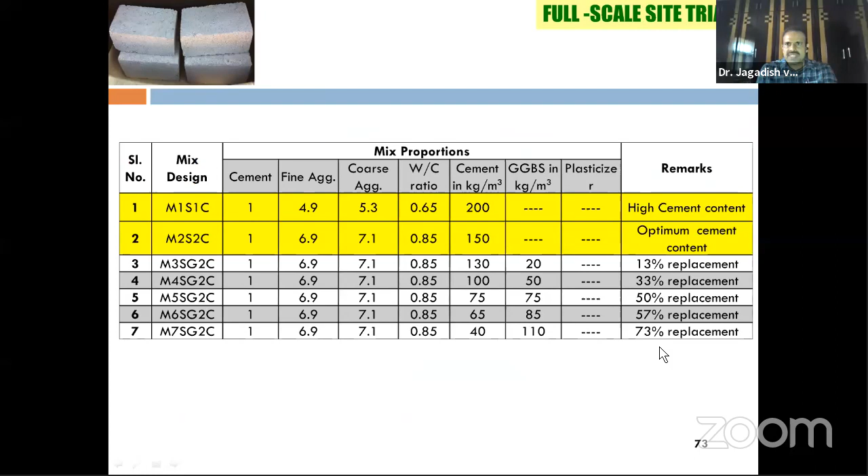These are the full-scale trials we conducted by taking the optimum mixes from the laboratory trials, wherein we considered 13, 33, 50, 57, and 73 percentages. This casting was done at one of the solid manufacturing plants, using an egg-laying machine where you continuously make the blocks. Using all these mixes, they conducted more than 300 blocks at the site.

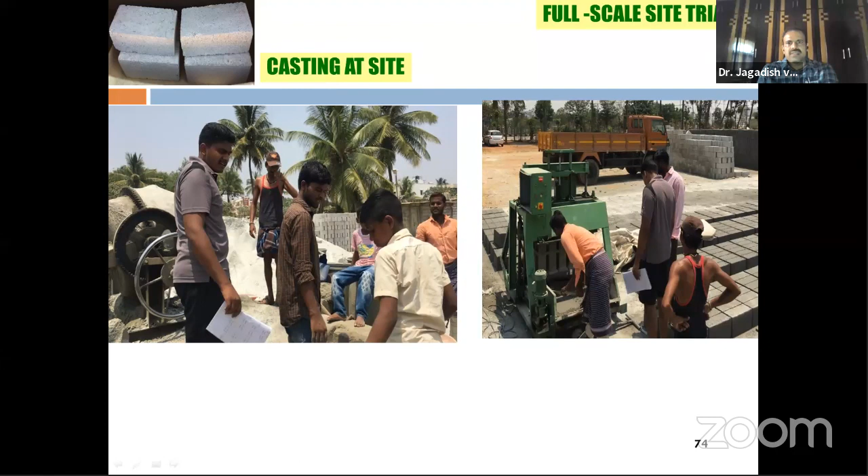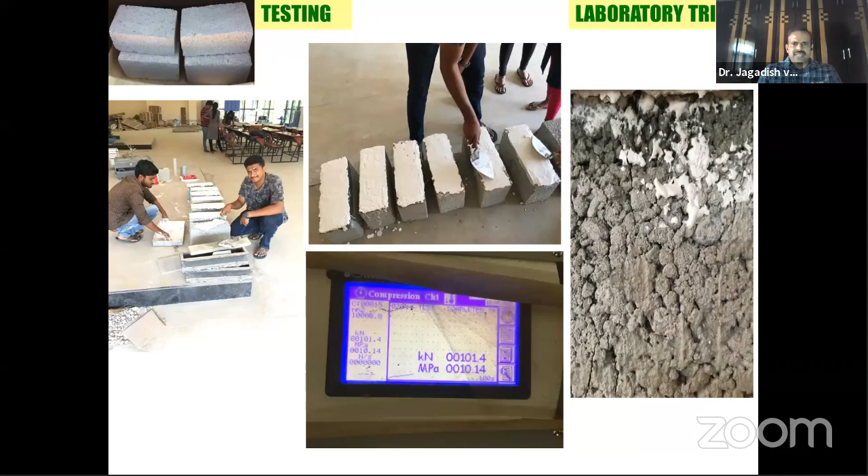After the blocks are casted, they're brought back to the laboratory, and you need to have a proper surface. So you apply POP, plaster of Paris, before testing for consistency. And they have tested for each trial.

These are the test results for 7 days, 14 days, 28 days, each time they tested 8 blocks, and these are the average of 8 block results. Water absorption is also less than 10%, density is more than 1800 kg per cubic meter, and strength is also more than 5 MPa even after replacing 70% of cement, that means 150 kg with 70% replacement with GGBS.

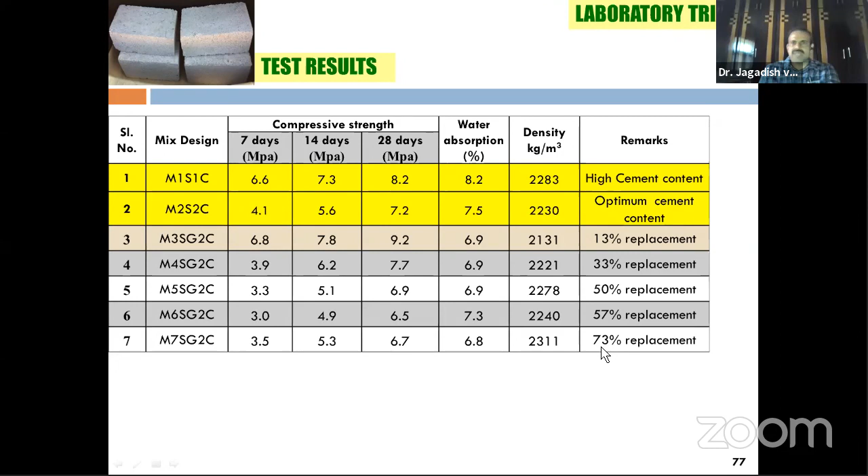This is once again to remind you compressive strength, density, and water absorption values. This is about only the remarks for this particular project, wherein one can use GGBS as a part replacement, and plasticizers can reduce water content and increase the homogeneity. You can use it, but should not use excess because it may stick to the egg laying machine sides.

So from the experiments we understood that cementitious material of about 150 kg is sufficient to produce the required strength, one need not go beyond 150, and even up to 70% of cement can be replaced using GGBS.

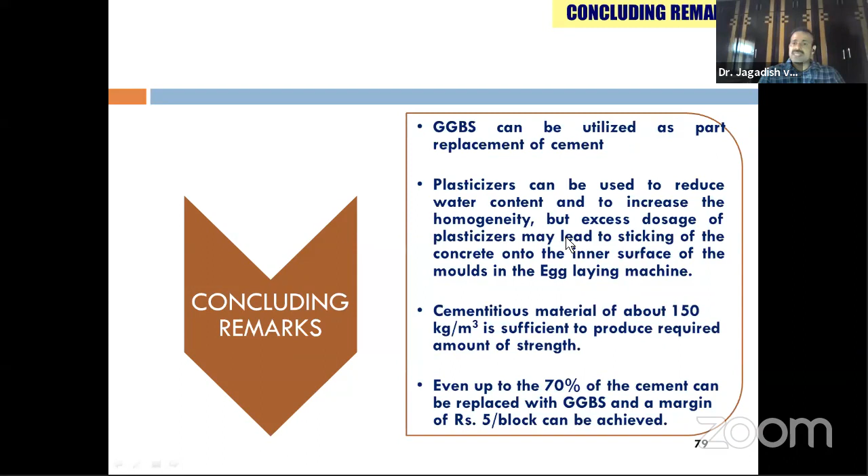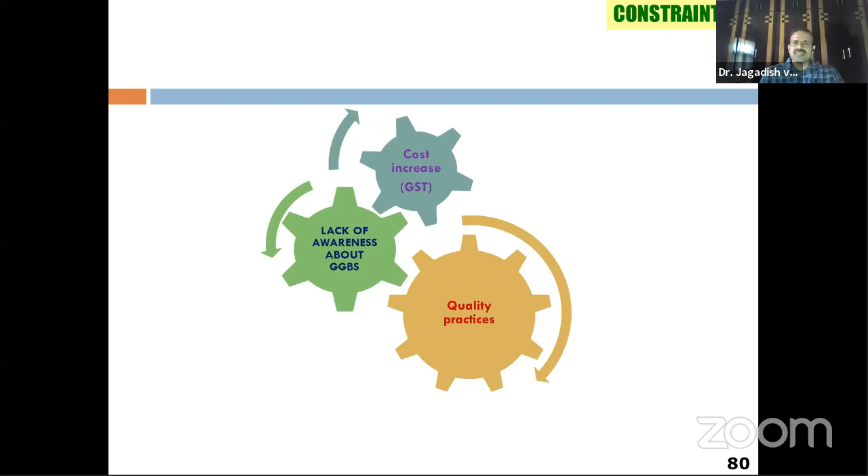I will talk about the cost parameters in the next slide. There are some constraints like cost increase, GST increased recently after it came in, and many people lack awareness about GGBS. At some sites a lot of awareness was created after that project, but good quality practices are still constraints one has to follow.

So we thought of coming out with some guidelines working with JSW, and chemical admixtures also have to be tried at the site itself to check the finishability and other things. We also had to visit a number of other sites at different places before formulating the guide.

One interesting study was the cost analysis made, wherein if you take a 6-inch concrete block, typically the manufacturing cost comes out around 28 to 29 rupees. Market price is around 34 rupees, so profit per block you get around 5 rupees. Okay, suppose if you use GGBS.

Suppose a particular plant, when you have the plant, you should produce a minimum of 2,000 blocks, otherwise there is no payback amount you get. Taking working days as 25, you can do simple math: 3 rupees profit per block when you replace cement with GGBS. Per day, 2,000 into 3 rupees is 6,000 rupees. Even taking 20 working days, 20 into 6,000 is almost 1 lakh easily as profit.

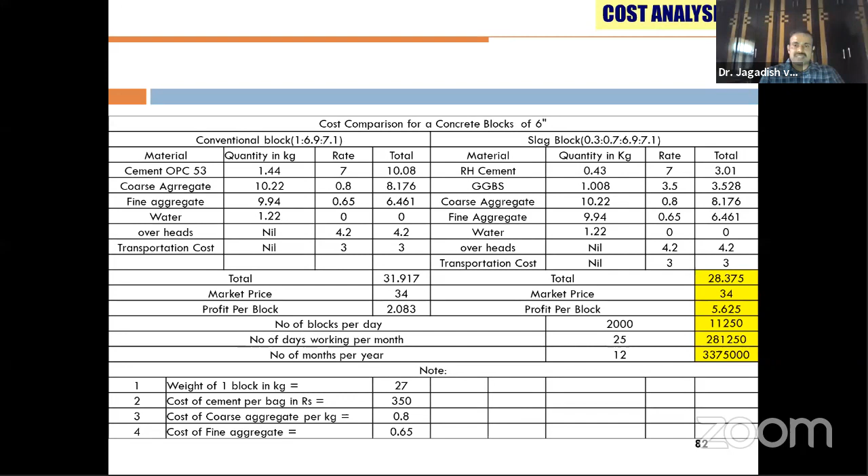So, 12 months, 33 lakhs just by replacing cement with GGBS. But as I mentioned, you have to take care of quality control and the mix proportions properly. Very simple.

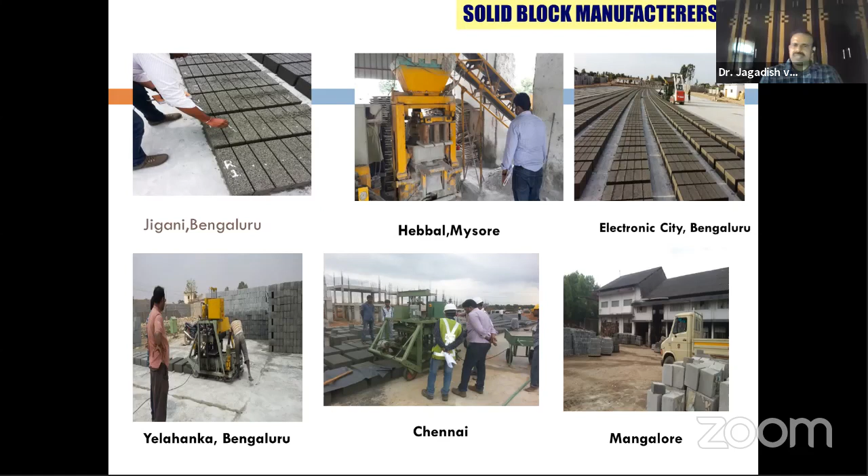JSW friends popularized this based on trials. They've gone to different places: Jigani plant, Hebbal, Mysore plant, Chennai, Mangalore, Yelahanka, Bangalore. They created awareness and showed them the results. They started implementing it and getting a little more profit in solid concrete. This is the outcome of the project.

GGBS can also be used in plastering of walls, wherein cement to sand ratio is 1:5. Cement can be replaced up to 20, 35, even up to 50%. Finishing will be good because you have more fine material in GGBS compared to cement, and permeability will reduce. Shrinkage cracks will reduce because less cement is used, and you have increased productivity.

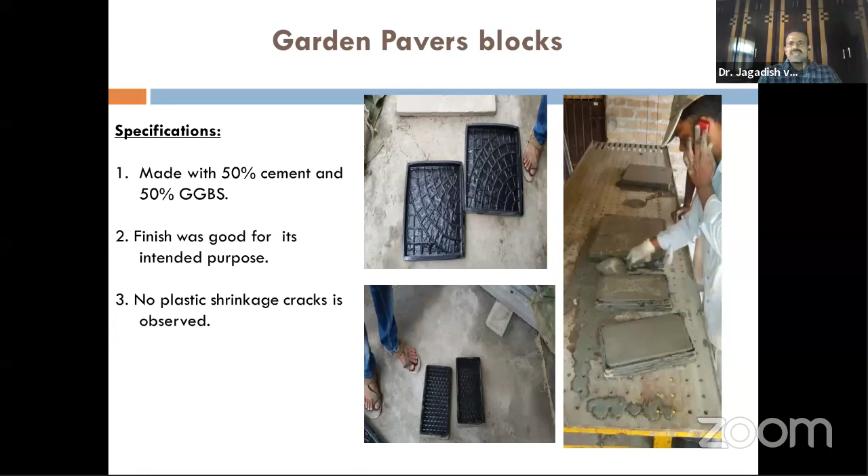Paver blocks can also be made with a 50-50 mix, and the finish will be good. In particular, the problem of shrinkage cracks in paver blocks, especially garden paver blocks, can be reduced.

I've almost come to the end of my presentation. I would like to acknowledge Mr. Satish from the R&D unit of JSW, and Dr. Manjunatha and Mr. Yogananda from JSW. These are some of my final year BE students, whom I troubled with this final year project: Mr. Raju and Shiva. I used the concrete laboratory at the time I was working there, and even SLV Solid Concrete Blocks unit allowed us to conduct trials in Bangalore.